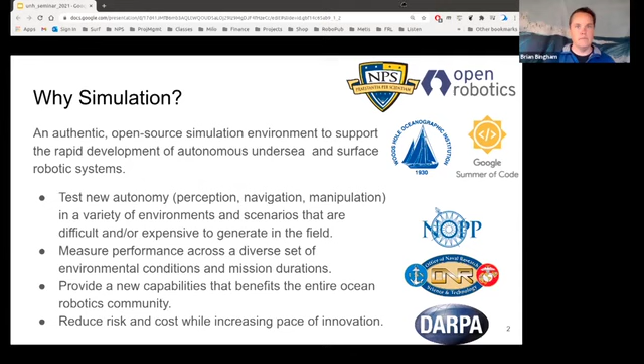So on the right-hand side, you'll see this is a collaborative effort. We're working with folks at Open Robotics. If folks are familiar with the Robot Operating System or the Gazebo simulation, through them we've had the last couple of years some great interns for the Google Summer of Code. If anybody's working on open source projects, that's a great resource that Google supports. Woods Hole Oceanographic, I won't talk too much about our project with NOPP, and then the funders of this have been NOAA through NOPP and through some of the stuff that CCOM works on, and ONR and DARPA.

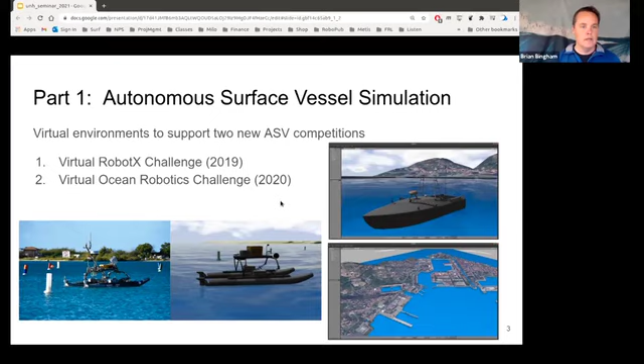And so I'll do a little bit of a deep dive, no pun intended, on a couple of the features of that. The big idea is that what we're trying to do, and our real high level goal in this, I've been involved in maritime robotics for 20 years now, at least. And we want to try to start connecting some of the great things that are going on in the other domains of robotics to our maritime community.

So one of the things that's going on is investment from lots of different folks, industry, academia, government, in tools. So probably a number of you have heard of the Robot Operating System. I'm not going to talk too much about it, or the Gazebo simulation environment, which is used by tons of folks. It's a very general purpose simulation. Brian Gerkey, the CEO of Open Robotics, would call it the best possible substitute for the hardware robot. It consists of some underlying physics. You can simulate sensor feeds, so you can basically simulate what your algorithms will see and hear and feel in the real world. It has a graphical user interface. You can run it on the cloud.

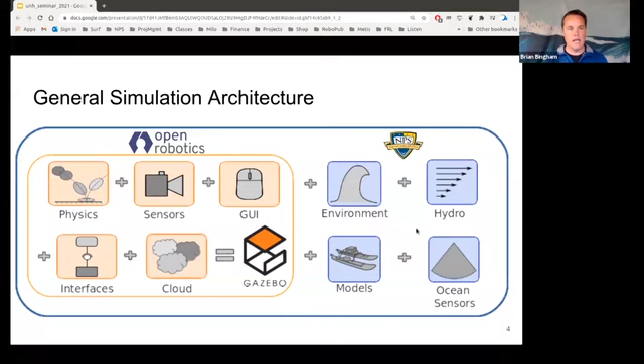And what we added, the sort of NPS piece in blue, is working with Open Robotics, we added some environmental pieces that are specific to the maritime environment. Some really simple hydrodynamics, some models of boats and sensors and buoys and docks, and then really, I think almost the most important thing is some of the specific underwater sensors. So I'll talk a little bit about some of the stuff we're doing with forward-looking sonar, getting into some of the things that would be more interesting for hydrographic survey, but it's really early. I've talked with some of the UNH folks on that front. But so the blue parts are what we're trying to add to it. And I'll talk a little bit about how we link that up.

So these simulations, the capability is, like I said, to use Brian Gerkey's words, we want to create the best possible substitute for the real robot. And we want to exercise the different parts of what we would colloquially call the autonomy. And so in order to exercise the autonomy, we want the boat to move like the boat will move in the experiment.

And so one of the parts that we have is, if you're familiar with the Fossen unified vectorial model for robotic vehicles, this is the same equation that's in every paper on underwater or surface vehicle dynamics, at least on the robotic side. So we implement that within this Gazebo structure and make a lot of simplifications, because one of our constraints is we want it to run in real time.

So this is not a naval architecture simulation. This isn't AEGIR or LAMP or Navisim or anything that's going to allow you to design the next DDG 1000 hull. But we can put a shape into this simulated ocean environment, and using these almost standard approaches for maneuvering, so operating in X, Y, and yaw, and sea keeping, so pitch, roll, and heave, we can generate motion that exercises our control system and our perception system in a way that is similar to what we'll see when we put these vessels into an experimental endeavor.

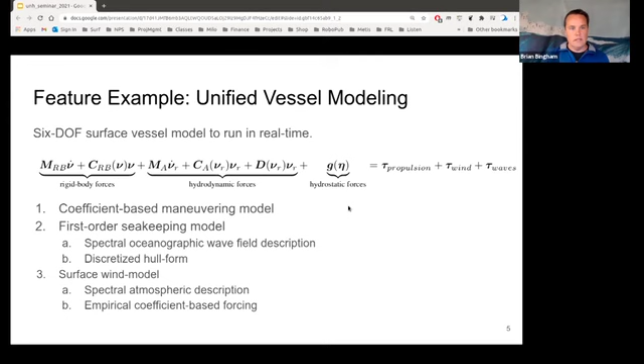So at the end of the day, and I'll show you some videos of that, what we're trying to do is generate motion that is both qualitatively and quantitatively similar to what we expect in the experiment. And it allows us to run tests. So when we run these competitions or our own tests for our own development, we can say we want to test in sea state 0, 1, 2, and 3, and every increment between, which is really good because it allows us to explore that envelope and find out where things are going to break.

So we do something similar for wind. Again, I won't go through the math too much, but we haven't even published this quite yet. We're putting this into a special issue this spring. We generalize a standard spectrum from the middle of the 20th century that describes the wind, and then we can do the same idea. We have a statistical description of the wind, and then we can make some simplifying assumptions and calculate that for a case of sea surface roughnesses.

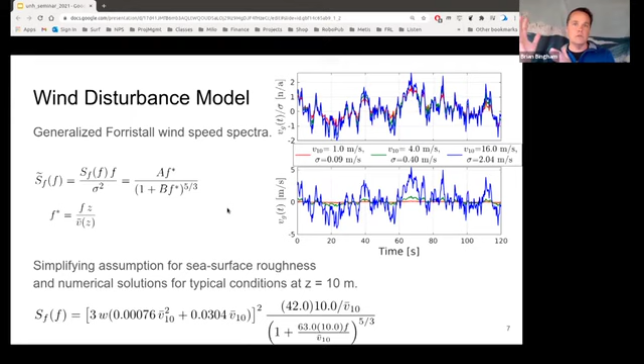We do a bunch of other stuff, and then these videos will show, based on a couple of these tasks, two of what we call the foundational tasks. So we want to be able to get to where these robots are doing very sophisticated things, but we have to be able to first do some pretty simple things like go to a position. And so over on the left is one of the teams that participated in VRX, which is the Virtual RobotX competition.

And their team doesn't see any of this. This is all done autonomously, and basically our testing of their software. And they're given a position. Like if you're familiar with dynamic positioning on larger ships, they want to do DP on this vessel, this catamaran. There's no real optical component or surrogate for the wind, but you can see that the vessel is moving around in the waves.

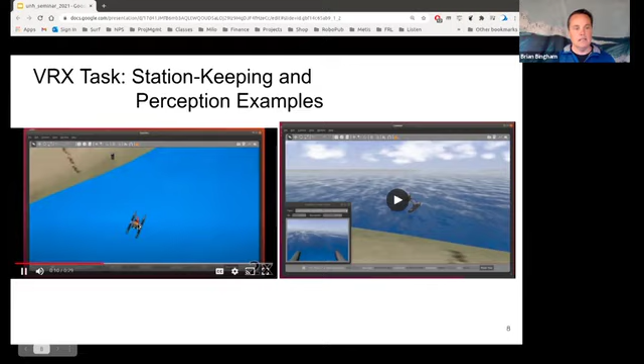And so what they need to do is go to this position, which they have a GPS location for. They need to estimate their position, and then they need to achieve that XY position and heading. And then we test that in simple conditions, like lake-like flat conditions. Then we test it where you've got a wind that's directly on the bow, and then we test it with a wind that's kind of coming off the quarter to be able to see where things break.

This is the University of Florida's team, which has, you know, what's the euphemism there? These are not selected at random, right? This was the University of Florida, who for a long time has done a really good job. Their station keeping in this program has been pretty notorious for being pretty good. And part of it is the mechanical design of the way they've got their thrusters oriented.

Over on the right is the other part that this physics exercises. So you can see one thing on the right is that we've added some fog to the environment, so you can't see as well. And then this is kind of an interest. So we wanted to isolate perception. And so in simulation, you don't have to worry about controlling your robot for now. You just want to worry about perceiving obstacles.

And so a nice thing about simulation is we can virtually lock the vessel in those maneuvering components in X, Y, and yaw, surge, sway, and yaw, and allow it to move in the sea-keeping components. So heave, pitch, and roll. And so what you see here is that the task was to report the identification and location of a known set of objects, in this case, like red and green buoys, black obstacles.

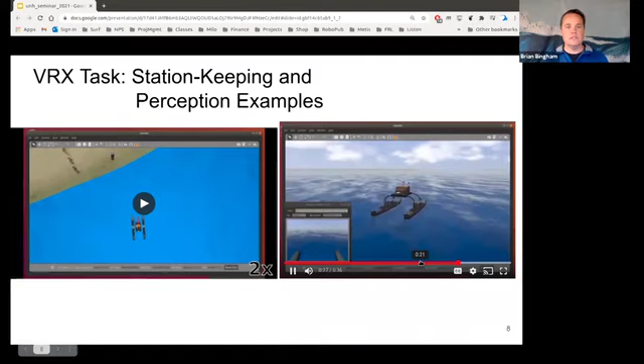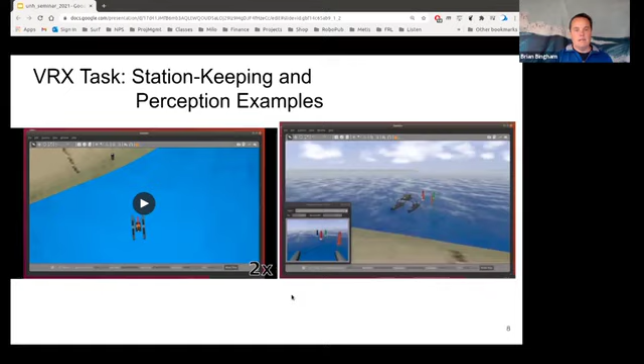Again, they don't see this third person view that you see in the window, but what they do have access to is the simulated camera feed. So if you look in that camera feed in the lower left corner of the video, you can see one challenge of doing this that is different than a 2D indoor robot. On the ocean, your camera moves around. And so you want to have your identification, characterization, localization of objects be robust to the camera moving. So again, exercising that piece of the perception in terms of being able to perform in a variety of environmental conditions.

So the last little bit about the surface vehicles. So we've done these two different competitions. We're actually gearing up for the next virtual competition, the Virtual RobotX competition, that'll happen starting any day now, and will probably run over the new year into the spring, and then lead on to the culminating physical event in Sydney, Australia.

And I really have no vested interest. I don't think it's a conflict of interest, but I think UNH should have a team. And one carrot we can dangle there is the venue; the new venue in Sydney, Australia looks fantastic. It's actually from the Olympics, the whitewater course. So they won't turn on the pumps for the whitewater, but it's this beautiful basin on the west side of Sydney near the Blue Mountains. And the virtual part is that wide area of the funnel to get teams interested before they invest the time and fundraising to actually field a robot.

So I mentioned that the competition UNH actually participated in was an intermediate competition that was done this fall, and the culminating piece of this was a simulation task where the teams were, all completely autonomously, looking for a black box. So looking for an acoustic beacon. Again, in simulation, we can give a physical manifestation of that. It's this red marker in the middle.

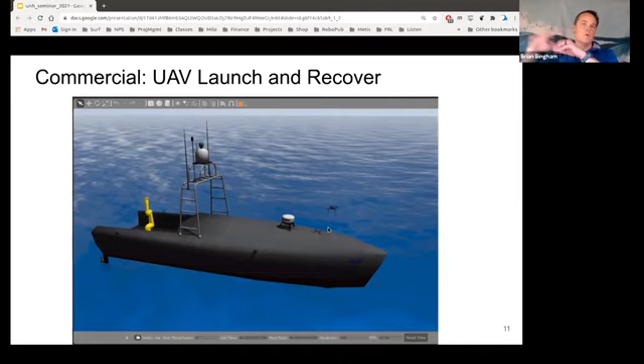All right, I'm going to take a break before I talk about the underwater pieces of it. So we're 34 minutes in. So I'll maybe just pause there and ask if there's any questions on the surface craft parts of it. It doesn't have to be. I can talk about underwater vehicles if that's where we want to go.

Hi, Val. Hi, Brian. This is Val. I have a question. I have a lot of questions, actually. Yeah, we should probably talk. Yeah, I'll keep them brief because I'm sure other people have questions too. But I had a couple of quick ones.

Have you talked with the Open Robotics folks at all about modifying the Gazebo simulation to better support field robotics? Things like coordinate system changes and simulations that extend over a large areal extent that have big differences in scale, or maybe a big extent in horizontal scale and a relatively small extent in the vertical scale. Yeah. So I'm gonna skip forward. So let's see. So that is.

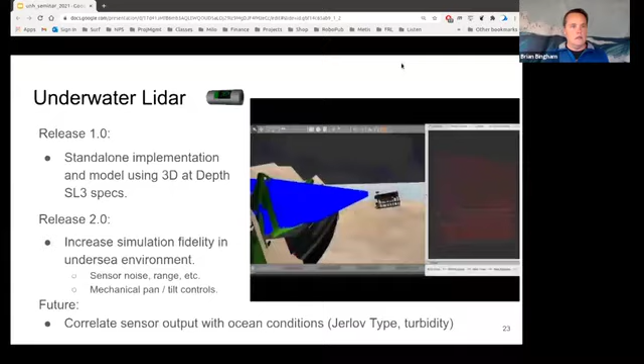Sorry, I'm stealing your fire, aren't I? No, that's all right. So no, that's great.

So this is definitely things that CCOM would be interested in, and I know we've talked to them. So there's a lot of people talking about those kinds of issues, right? And folks at Woods Hole Oceanographic. I think MBARI is doing a new project. It's yet to be determined how much of those features are going to be integrated into Gazebo or the next generation of Gazebo, which is called Ignition.

Yes. So a lot of this stuff came from Mike Jakuba at Woods Hole Oceanographic, and we have a postdoc here that moved it into some of the stuff we're doing. The basic idea, as Val mentioned, is that Gazebo was really conceived for small spatial areas. By default, for every object in the environment, it is all the time looking for the cross correlation of contacts. Is any element in contact with anything else? And that explodes exponentially with spatial scale if you leave things at the same resolution.

So one of the ways around this that has been developed both by Open Robotics and with Woods Hole's bathymetry processing, Open Robotics more for their subterranean challenge, Tim Chung's DARPA challenge for underground robotics, again large areas, is to use tiling. If you've got a big bathymetry map, that's what this shows here, we're loading bathymetry from NOAA. We pre-process the bathymetry into stuff Gazebo can understand.

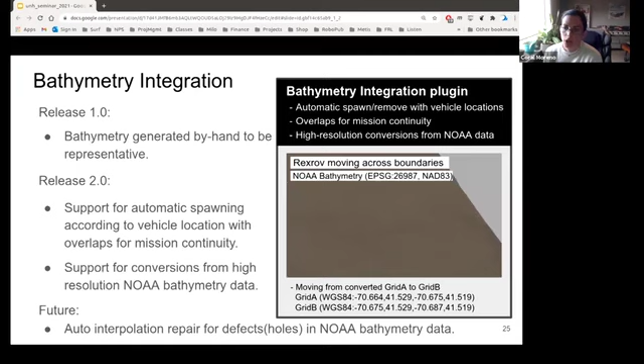Thanks, Brian. We have one more question from Diane. Brian, this is really exciting. How well does the simulation of the sea state work? Which of the estimates is the best, and which needs the most work? As I recall, Bretschneider breaks down in shallow water. Oh yeah, definitely.

And you're not sharing the screen anymore. Yeah, I couldn't figure out how to look at the chat. First, hi Diane, good to hear from you. Let's see, I'm gonna get back to, I think that's it.

It is somewhat generalized. Part of the question was, if we're generating sea states based on a particular spectrum, how general is that, or how do we use other spectra? Oh, go ahead, Diane. Brian, to comment on that, in shallow water the nonlinearities get large and the sea slope gets steep, and it's both skewed and asymmetric. Bretschneider is certainly appropriate as a way to start, but do you have thoughts on where to go from there?

Yeah, we just haven't had a demand for it quite yet. Right now we can simulate the steepness of waves using, I may not even be saying it right, Gerstner waves. But a colleague of mine from Carderock, Joe Klamo, always gives me a hard time that we're making it too simple, and we talked about using Stokes waves to get a little more reality into the actual wave shape.

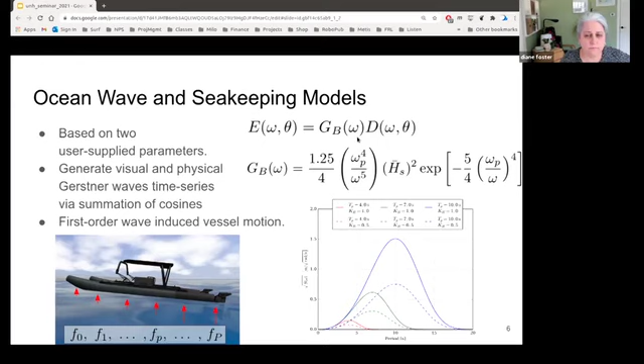And they're using that for doing long duration bathymetry mapping. So right now they've integrated a DVL. They're going to integrate a, by UNH standards, very low resolution bathymetry, and using the underwater glider with, probably folks are familiar with the Wave Glider, I now think owned by Boeing. So using the Wave Glider as the navigation and comms gateway for an underwater glider. That's the sort of genesis of that project that's been going for a couple of years.

COVID has slowed it down a bit. It's known as EPIC-DAUG. And so they want to be able to do the same thing before they go off Puerto Rico and do the real deal. They want to test their terrain-aided navigation, their inverted USBL navigation, and this new vehicle in a simulation environment. The other project is a sponsored project, but they have an onerous public disclosure.

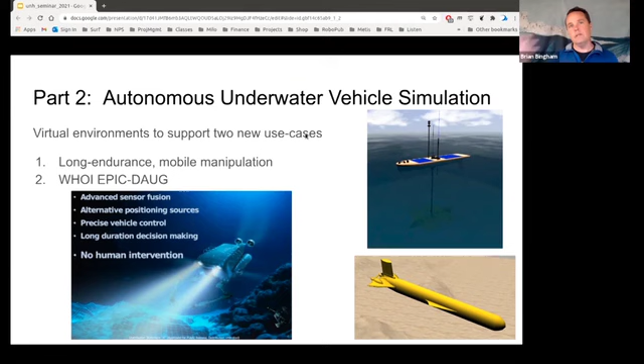So we're not going to talk too much about the actual use case, but they want to be able to do long endurance mobile manipulation. So vehicles that are underwater for months, traveling kilometers, and manipulating things on the seafloor. And so we want to, again, be able to provide both the government and the performers with a surrogate environment to be able to do that.

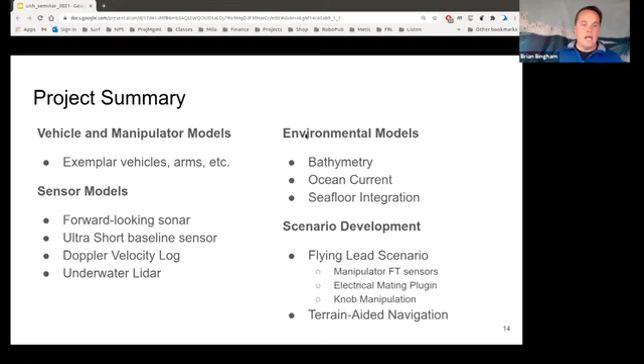So now we get into a very different sort of physical domain. We're not as concerned with waves. We are concerned with ocean currents. We're concerned with the same sort of dynamic equations, but in 3 dimensions, or in six degrees of freedom, and a bunch of the manipulation. So I'm talking about robotic manipulator arms, and I'll show you some videos of that.

So we've been able to create a bunch of surrogate vehicles. So generalizing commercial off-the-shelf vehicles into artistic renderings and hydrodynamically similar vehicles. That's been kind of an interesting odyssey, because obviously the vendors get pretty proprietary when you talk about the details of their model, but we just want something that operates kind of similar to standard remotely operated or autonomous vehicles.

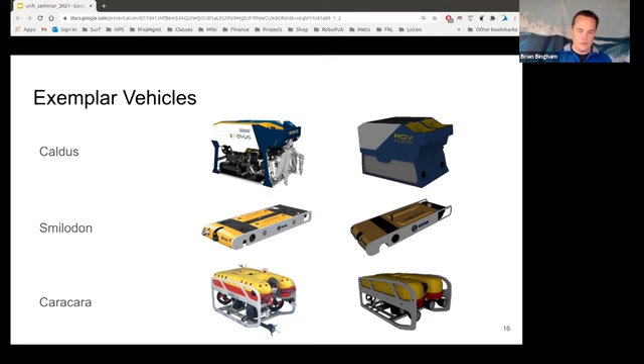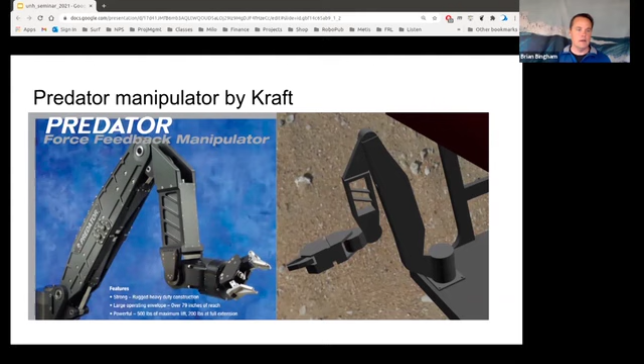So we've been able to generate a new library of vehicles. I'll show you some other ones in a second. We've been able to generate some surrogates for, they don't look very good yet, but they operate the same. They have the same interface as some of the standard electrical and electrical hydraulic manipulator arms.

Sensor models. So this is actually something that our postdoc here at NPS, he's not actually physically here, he's still in Korea because of COVID, and Derek Olson in the oceanography department, we've been really interested in, and we've been learning some stuff from Val and his team about simulating underwater, not near field, but short range forward looking sonar. So this is a big part of the perception for underwater manipulation in turbid environments. And this was something we saw that we could contribute to.

So this was just released in December, and the sum of this is we've got, which is kind of new to Gazebo, a physics-based method using scattering to generate, not only like up here in the upper area, what had preceded and what was out there before was really very much image-based.

So trying to generate images that look like the post-processed version of what a sonar would give you. And what we're trying to do is generate something that a machine could look at. So actually looking at not the raw data in the sense of individual acoustic channels, but looking at the post-beamformed intensity as a function of beam range or beam time. And so that's kind of cartoonish here of generating those intensities, add in different kinds of noise.

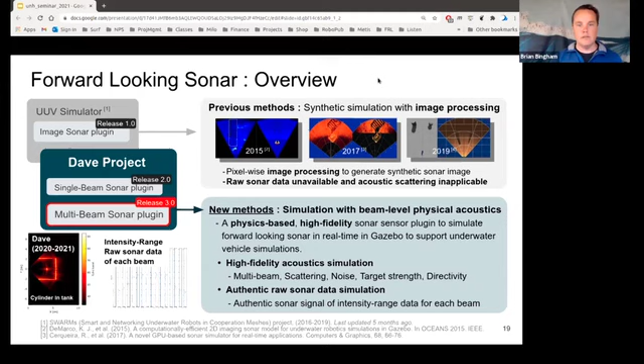We're actually working with Laura Lindzey and Aaron Marburg at University of Washington APL. They're doing some tank tests for us. We were trying to do those last year, but the pandemic got in the way. Trying to do some tank tests to be able to tune the model and do some simple verification of the underlying theory. So that generates, there's a little animation here, so you can start to put your sonar into a virtual tank and get things that not only look like sonar images, but give you the same data interface.

And actually, you can take this. One thing that I'll probably be picking y'all's brain about is, we would like to find a, maybe not open, but the least proprietary sonar viewer out there. So we've tried to reverse engineer some of the BlueView SDK, some of the other commercial viewers out there, but we would really be interested in being able to have our data plumbed into an honest to goodness sonar viewer.

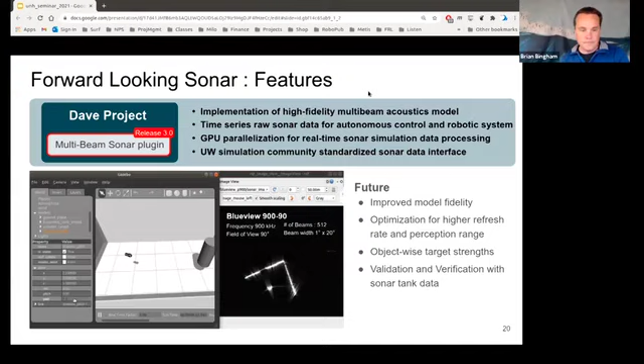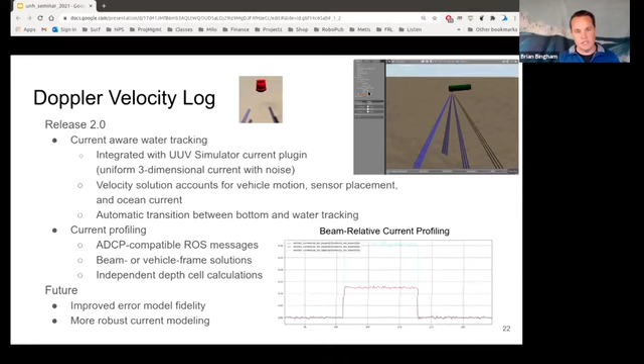So I'm going to kind of accelerate here because I want to talk about the UNH pieces. But Dana Yoerger, a long time ago, when I can remember when we didn't always use Doppler velocity logs, and this is obviously even the reference is dated, he dubbed the Doppler velocity log the American Express of sensors. You don't leave home without it. And the Doppler velocity log has sort of become almost a meme in underwater work in our simulation work, in that there are like 14 different implementations of a Doppler velocity log in simulation, and we're trying to bring those together and bring together some common messages so that we're not all reinventing that wheel.

And underwater LiDAR, skip over that a little bit. So I mentioned being able to do tiling and bathymetry. I'm going to skip the flying lead piece. The real story that I wanted to tell is some of the stuff we've done in collaboration with CCOM and through the National Oceanic and Atmospheric Administration and the Global Foundation for Ocean Exploration. So this is a bit of a sea story, so to speak, is that we've been able to use this. So, gosh, this was, I think, 2016. We started using these simulation environments.

So over here on the left, you can see while the mechanical and electrical team were building out a new remotely operated vehicle called Yogi, those of us who were interested in the control side and writing the software for that vehicle, this is not even an exaggeration, I was writing the control software with a simulation at my kitchen table in Pacific Grove, California, while the folks in Rhode Island were doing the hard work of assembling the foam pack and getting all the thrusters to work. And then we were able to come to the tank there in Durham in the wintertime, of course, because that's when you go from California to New Hampshire.

And we were able to put that vehicle, Dave Lovalvo and the group there has a great relationship with y'all at CCOM and have tested many vehicles. And we were able to come there for a week, I think it must have been early 2017, and put the vehicle in the water. So you can see from simulation, which doesn't look very good, but behaved very, very similarly. And it was, at least for me, one of the success stories of being able to write all the software architecture in a simulation environment.

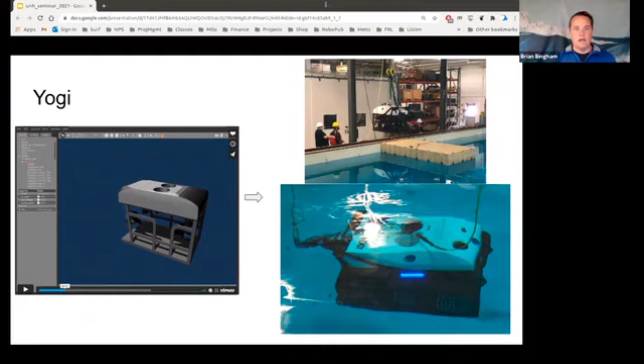So basically with the simulation, we can generate Doppler velocity log, INS, compass, depth, we can develop our estimation algorithms, we can develop our navigation and control algorithms, we can even do the thruster allocation and get these parts of the vehicle software going in parallel with the mechanical and electrical folks.

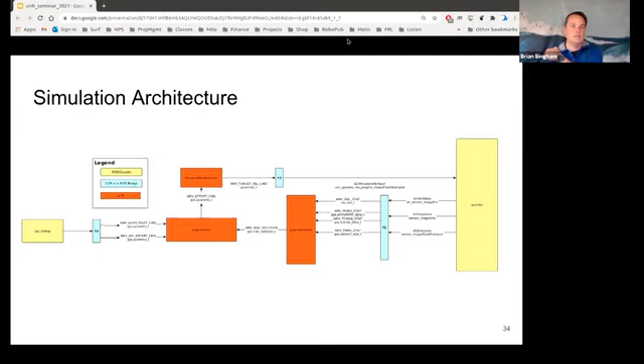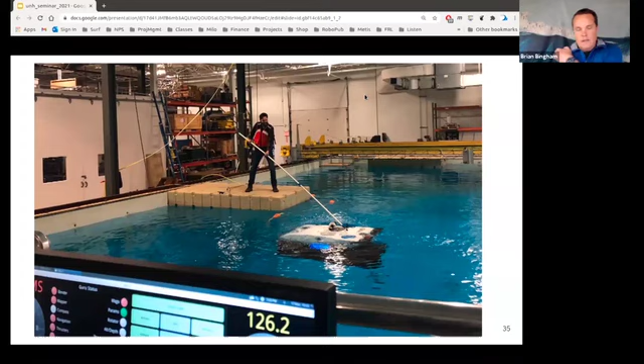Oh, sorry, I should finish my Yogi story. So from the tank at UNH, the vehicle got on a truck and went out to Yellowstone National Park, working with Rob Sohn and his group at Woods Hole Oceanographic, looking at the geophysics of Yellowstone Lake, which is a beautiful place to work. Dave Lovalvo has been working there for 30 years. A new research vessel called Annie. This is that new vehicle with the control system developed in simulation. I thought I put a picture of it in the water. I guess I didn't. Finally going out in Yellowstone Lake and doing real science.

And then what we're up to right now with that team is this vehicle, which is much, much bigger than Yogi, and has actually been in the test tank at UNH even before that, probably 2012, 2013. And we are actively doing a refit of that vehicle that you see on the left called Deep Discoverer, or D2, to its friends and family. And we have been working just this week on a digital surrogate of that vehicle. There you can see the little animation of D2.

And what we're working on now is refactoring the whole control system and new thrusters, a bunch of new components, a bunch of new capabilities for that system. And we're doing the same thing. We're taking care of all the stuff that we can, all of the software architecture, getting basically the plumbing of all the software working in this simulation environment.

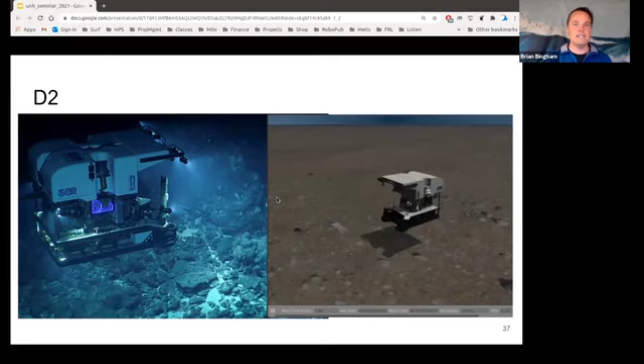And then the next step will be, I think at the end of April, beginning of May, the team's going to hopefully take this 9-foot tall behemoth into the tank at UNH, and then we'll start testing. And hopefully that testing will be much more efficient because we're able to do all that architecture work in simulation. And as I said before, the stuff we're testing in the tank is stuff that we must have the tank to test, right? So that's kind of where we're at with that.

I think probably the second to last thing I'll say is there's tons of opportunity to get involved. Roland and Val and Carell have seen this. We had a community meeting that was very much grassroots in December of last year with the folks you see represented there on the right, just to raise awareness about what everybody's doing. We're in a rare spot where we're actually interested in the simulation itself, but the simulation is always a means to an end. And if we can work together to develop these simulators to test out the new ASV at UNH, to test out the new vehicle for GFOE, we can get to the end state much quicker.

So, aspirationally this quarter, I want to convene another meeting of the usual suspects. So if you're interested, drop me a line.

So only a few minutes left, but it is a team effort. We're lucky to be supported by great folks at NOAA and ONR and DARPA, and wonderful to work with folks here in Mountain View at Open Robotics and up in Woods Hole on the Cape.

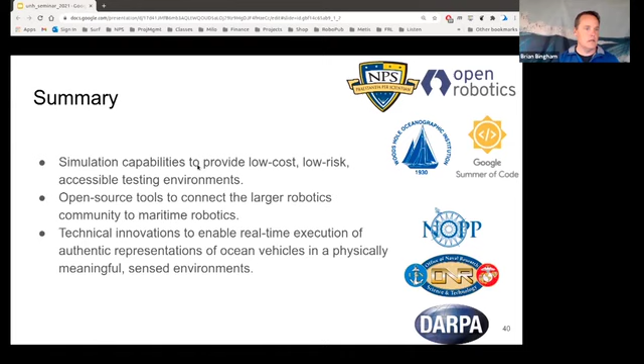Yeah, Ben, sorry, thanks, Roland. I was blanking on the name.

Let's see. So the question is, to stay current with our latest work, should we already be looking forward to technology like ROS2 and Ignition? So for those of you who aren't in that world, there's kind of a hard change coming down the road with these tools that the general robotics community uses. So there's ROS1 and Gazebo, which are the middleware and the ecosystem for doing robotics things, not just in the maritime environment, and Gazebo, the simulation environment, which are separate projects all within Open Robotics.

Both of those are going through a huge change in architecture to ROS2, which has got some huge advantages, and Ignition, which has some really exciting things, as Val was mentioning, to be able to scale it up, to be able to use different physics engines. I'll say a few things on that.

One, I know that I went to a talk, gosh, pre-COVID up the road here at Moss Landing in MBARI, and the official party line from Open Robotics was, if you're new to developing with these tools, don't worry about learning ROS1, learn ROS2 and Ignition. My experience has been that they are quite different.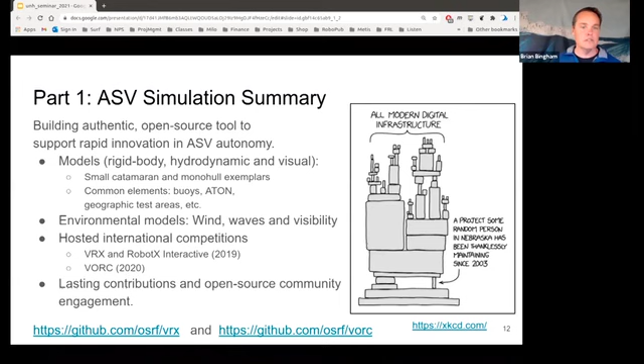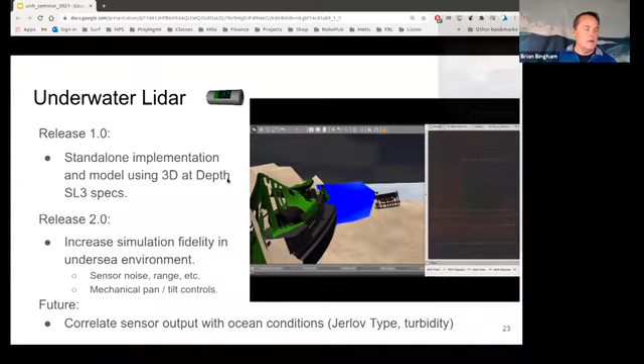Mhm. That's great. You glazed over a slide, I think you skipped it because you were running out of time, about DevOps, and I was wondering what was on it. Yeah, here I can show that. Am I still sharing my screen? No. So it's just kind of, I skipped over a few here.

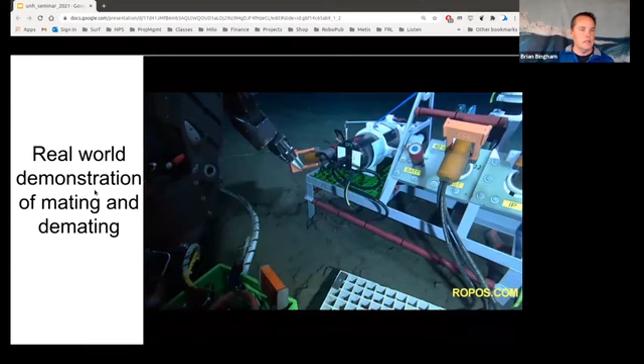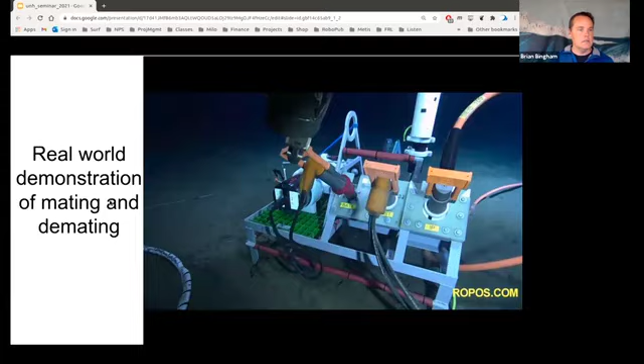So one of the things that we did, we actually had an intern that worked on it last summer, which I thought was a really cool thing. This is from ROPOS, but you guys are probably familiar with connecting ODI connectors underwater, and so we did the same thing. There's a little video here.

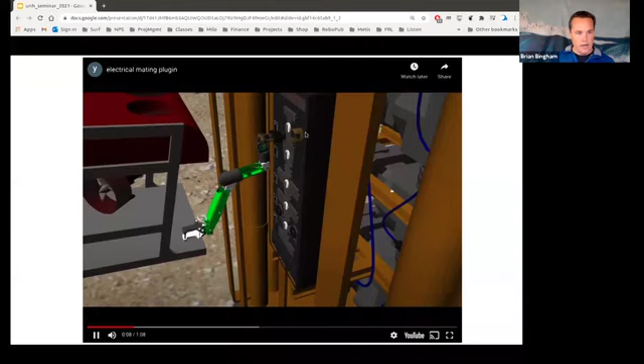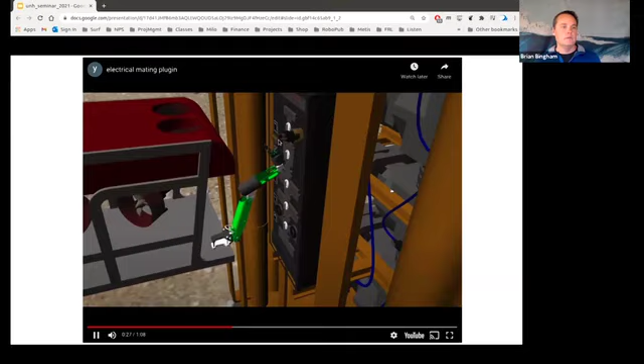We generated this mechanical model, and then have a plugin that is actually inspired by the ROV operator's manual, which says the alignment of these two connectors needs to be within 10 degrees or 10 millimeters in translation and orientation. And then it specifies the mate and demate forces. And so we were able to write a plugin to reproduce that, which was kind of a cool feature, very specific to this underwater manipulation piece.

But the DevOps, so we're still learning, as mechanical engineers. We are by no means disciplined about using unit tests on everything we do, but we are able to do simple stuff through what Bitbucket calls pipelines, GitHub is actions, I think. Simple stuff like a Docker build that runs every time there's a pull request, so that we can do a little bit of regression analysis. We have static checks for the style guide. Pretty simple stuff, but it's been kind of exciting.

We've used Docker more and more, both for continuous integration, continuous development, but also just for development. I've been really impressed by being able to run Docker in an interactive way and have it have access to the GPU.

Some of our projects are using Ubuntu 18, Melodic, and Gazebo 9. And then we've got some projects that are Ubuntu 20, Noetic, and Gazebo 11. And with Docker, it's really simple to switch back and forth between environments, and have a set development environment for each project. So yeah. Ever do deployments on a Docker image?